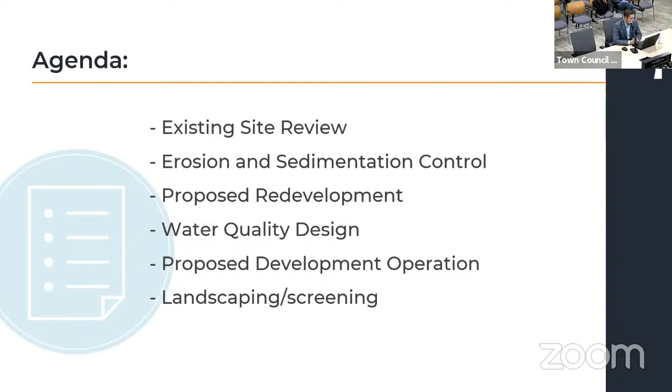Tonight on my agenda, I'm going to go through a brief existing review of the site. I'd like to talk a little bit more about the erosion and sediment control that we are proposing for the site prior to substantial development. I'd like to go over the proposed redevelopment itself, and focus in detail on my water quality design for the site, which is a substantial improvement to what is out there now. There is no water quality design out there now; essentially everything runs off the site to the adjacent detention pond. I'm going to speak briefly about the development operation for Sunbelt and how they're going to work with the water quality design to improve the overall environmental discharge from the site, and also speak briefly about landscaping and screening.

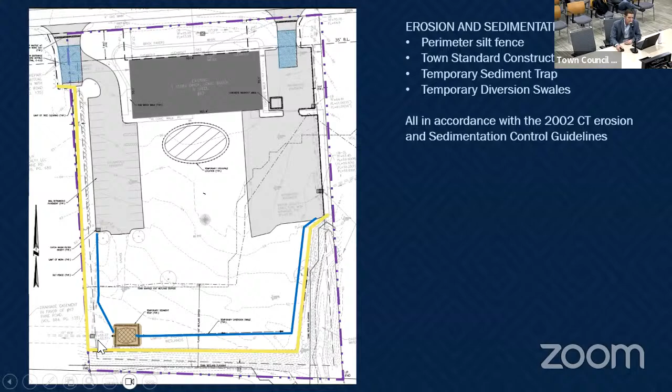As far as the proposed redevelopment for the site, as I previously mentioned, we are maintaining all of the existing pavement identified in light gray on the western side. On the eastern side, we are adding a small amount of additional pavement to allow access by a trailer truck, which needs to swing around into the rear of the property and then exit. To ensure that turning maneuver was possible, we had to add additional pavement in this area. The darker portion directly behind the building is an additional 0.38 acres of bituminous pavement that is installed.

There is also 0.69 acres of pervious stone storage yard. This is not intended to be millings - right now it's being identified as PennDOT number 67 stone, a type of stone with larger and smaller stones that lock together and bind. Unlike a gravel driveway that would rut, this type of stone packs together easier and is easier to track on, but it will still maintain drainage, unlike millings which would melt over time and essentially become another type of pavement. This maintains drainage abilities while still maintaining adequate compaction to allow equipment and vehicles to drive over and park on it.

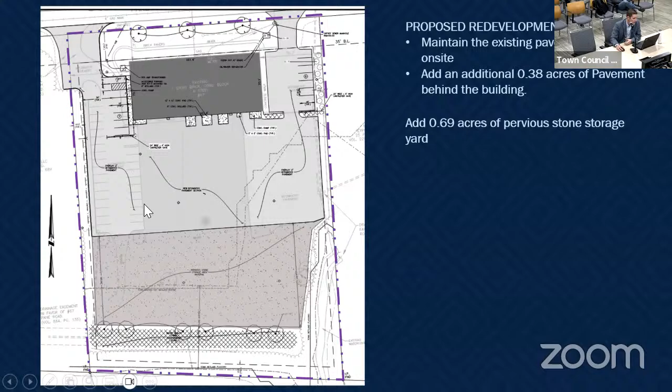So the remainder of the site is outside of the upland review area. There is a portion of the upland review area here where proposed bituminous pavement is located, but it is in the former location of existing pavement, so essentially the surface condition is not changing from pre to post.

Now, as far as the water quality design, to prove that this design is better than it previously was - the majority of the site is laid out grading-wise exactly the same as it was. The high point of the site is where the building is located, running in this direction at elevation 66, 65, and down as you go towards the detention pond to the south. The existing condition basically ran this to the edge and then dropped off down to the pond, with no way to convey, direct, or treat any of this flow.

In addition to ensuring that all of the proposed portions of the site get to the water quality swale prior to discharge, the development operation for Sunbelt is going to place their equipment in a certain way. Their management plan will be such that various types of equipment are placed particularly to benefit the environment.

These are some of the types of equipment that will be placed there - we have pumps, we have some generators. I was told that the majority of the equipment on site will not have hydraulic oil. Anything that does have hydraulics will be placed on the pavement area outside of the upland review area.

The other thing I'd like to reiterate is that these containment berms, in addition to the rented generators and specialty pumps, are another feature that Sunbelt rents. They can be utilized and are designed for secondary containment in the event of a spill. For example, any of the pumps or generators that could be placed within the upland review area could be contained with the secondary containment.

They do have smaller tray options, so essentially it could be slid directly under the machine. In the event of a drip, you slide the containment tray under the machine as a secondary means of protecting against discharge.

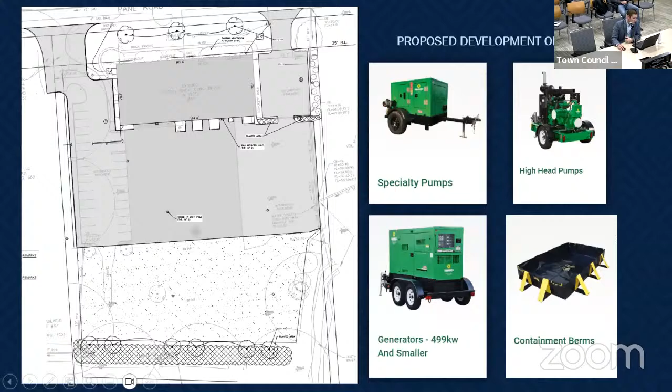I would also like to note, after some coordination with Chris and with Paul, that the developer has agreed to, in addition to the water quality swale, install catch basin snorkels, which are essentially catch basin hoods that are the final stage of protection in the event of any discharge. So if there's a discharge that isn't contained by the machines themselves, isn't contained by secondary containment, isn't contained by the water quality swale, if it were to overtop into the catch basin at the discharge point or any existing catch basins on site, it would stop any of that oil from entering the piping before discharging to the adjacent detention pond and wetland areas.

As far as the landscaping and screening for the site, we are showing landscaping throughout the water quality swale. There are additional screening trees planted along the boundary adjacent to the detention pond. The only vista in this area would be if you were parking behind Stew Leonard's, where you can look across the pond to see the equipment areas. So we placed maple trees to basically screen that.

We've spaced them such that in the event of any snow clearing, the snow can be placed in the swale to contain all of it and prevent it from discharging to any of the wetland areas. There are some additional street trees proposed at the front, and some additional arborvitae and other screening plantings potentially shown in this location that had been removed, although we've been alerted that there's been some additional clearing in the adjacent areas. So the developer has already agreed that if any additional trees for screening requirements need to be added, we can definitely do that along either the western or the eastern edge of the site.

And then briefly, Jen, if you're there, do you want to mention anything in particular about your wetland review and just the functions and values of the existing wetland, just to reiterate the point of the value of the wetland, if that's possible? Sure, I could do that.

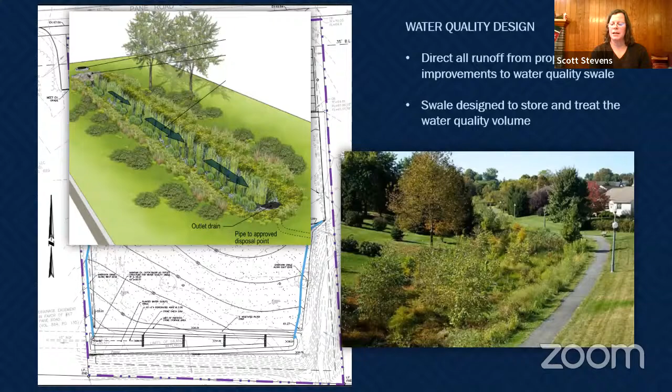Good evening, everybody. I'm Jen Benno with Soil Science and Environmental Services. I've been with the company since 1994. I just want to clarify something: Scott Stevens is a registered professional soil scientist with our company. He did the wetland delineation in November of 2022.

So if you look at our report, on page 3 there are a couple photos of the upland areas behind the building. That would give you a good idea of what the site looks like, at least when I was there on November 3rd of this year.

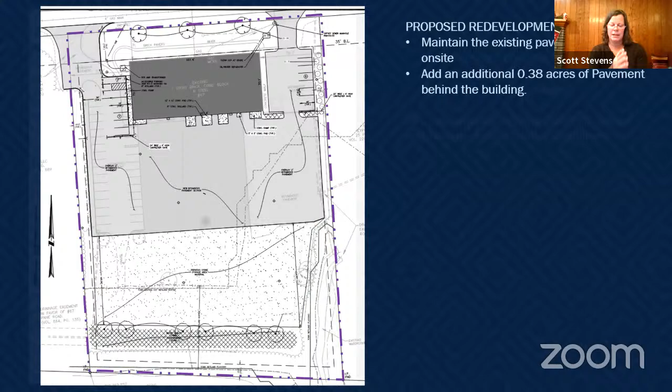And the pictures basically show that the entire area behind the building was cleared. You can see the vegetation, there's really dense vegetation on that side slope, from the top of the bank down to the detention basin area. You can see it on the aerial.

Scott did the wetland delineation, as I mentioned, November of 2022. His delineation report is under separate cover, also for that date, November 3rd, 2022. He delineated a perennial water course in the southeastern portion of the property, which enters the site from the west.

Yeah, we can go to that existing conditions plan sheet. Pretty much half of the upper section of that water course on site is lined with concrete. The rest of it, you can see where they had some previous stabilization measures attempted, including riprap and silt fence, but you can see obvious erosion along the water course. You can also see that in the pictures on pages 6 and 7, which give you an idea of what the perennial water course looks like.

So along the detention basin, which is south of the site, there is a very narrow wetland fringe, which was delineated by Scott. It has developed into what they call a palustrine emergent, like a shallow marsh, dominated by a lot of Phragmites. There's also a palustrine shrub, or shrub swamp, component to that. That's pretty much about it.

We did see several cans, bottles, and things like that floating around in the water. Unfortunately, we saw some miscellaneous debris, most likely from the old Frink's utilization of the project, and that would be in the southeastern portion of the site, and probably a little bit off-site too.

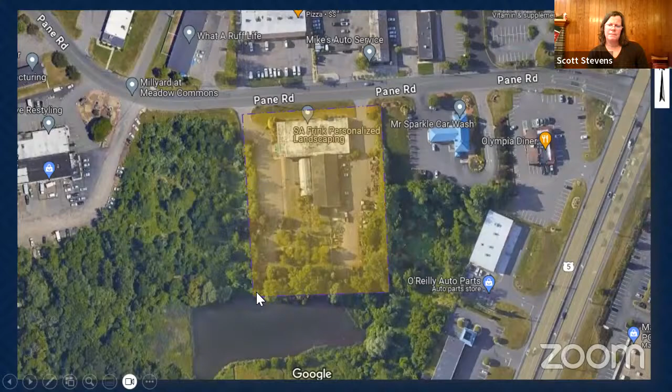So I think that's pretty much summarizes our report. If you have any questions, I'll answer. Excellent. Thank you very much, Jen.

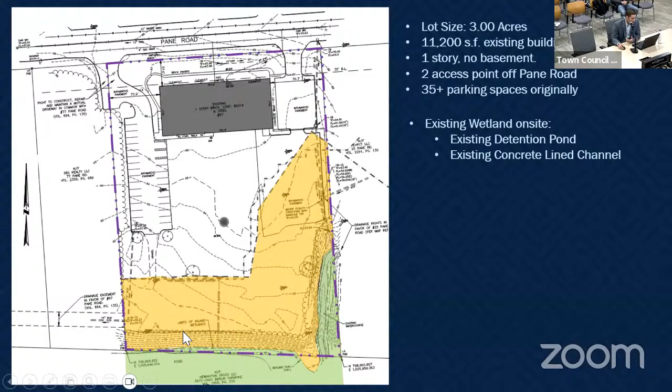I just wanted to reiterate the fact that because it is an isolated wetland and the functions are limited in this case, that essentially summarizes the presentation for this evening. We would like to respectfully request the administrative approval of this moving forward. Hopefully we have satisfied all of the requirements associated with the regulation at this time.

With regard to the multiple levels of containment for any potential spills, there will be spill kits on site. There will be containment of the individual equipment, secondary containment, water quality swales, and treatment measures at each individual catch basin. In addition to the fact that we have a limited functioning wetland, we would like to again request the administrative approval. Thank you very much.

Turn it over to my commissioners to see if there are any questions. Commissioner Paskowitz, go ahead. I don't really have a question, just a comment. This is one of the most thorough, comprehensive presentations that I've witnessed in the 11 years I've been here. Thank you very much.

Any other commissioners? Chairman Zelik? Commissioner Sadil? Yes, I do have a few questions for the applicant. Can you go back to the map that you showed of the site?

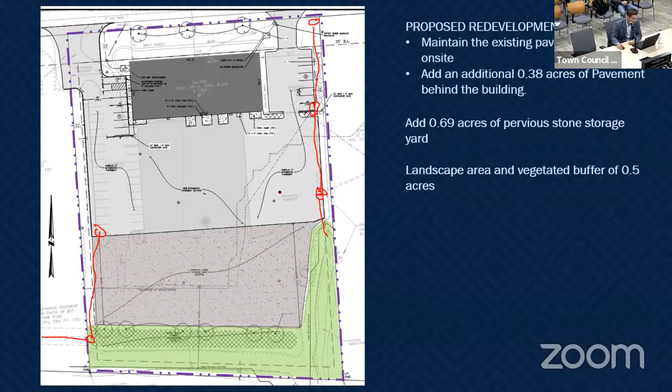No, I do not anticipate that, if I can jump back to the drainage plan here, or the grading plan.

All of the grades associated—let me switch to the laser pointer—the high point of the site is located in the vicinity of the main building, so everything runs away from that. I'm not anticipating that any of the design associated with 77 would encroach into this area or onto our site. If anything did, following installation of any sediment controls, they would direct that flow over to the existing discharge point and into the drainage system. As far as the controls for our site, I do not anticipate any of their construction affecting this.

Looks like he's dropped off again. Commissioner Sadil, so—all right, while we wait for Commissioner Sadil to rejoin, any other commissioners, questions?

Just a preliminary question—is Sunbelt still in operation on the Berlin Turnpike, or was that here? Yes. Okay, because I haven't seen any. So they're going to move from that location to this one? It was yes, they are—a representative from State Point, Mr. Sean DeBella, commented on that. Yes, they are still in operation.

I'll switch over to that area. It is not required by law. It is basically a good faith effort to provide additional containment measures.

I'd like to add that Sunbelt's intent is for all this equipment to be rented. This is a storage yard, but ideally they would love the yard to be empty because everything is currently being rented. They will have on-site maintenance designed in accordance with the state regarding cleanup for oils and so on.

The intent behind the maintenance associated with the development is that the equipment there will be in good running order. It is not going to be leaking. It is going to probably leave the site as soon as possible. It's basically intended to be transitory, but as an additional measure, the option to have secondary containment in place can be deployed.

Most of the machinery has built-in containment within a lot of the equipment. A lot of the equipment uses fuel cells instead of regular gas tanks as another means of maintaining adequate secondary containment. We have additional secondary containment on site that can be deployed as necessary.

Especially if it's within the upland review area or directly adjacent to the bank, even though we have swales intended to direct everything to the water quality swale, why have it discharge if we can essentially contain it? What I'm hearing is the trays are optional and can be deployed if needed.

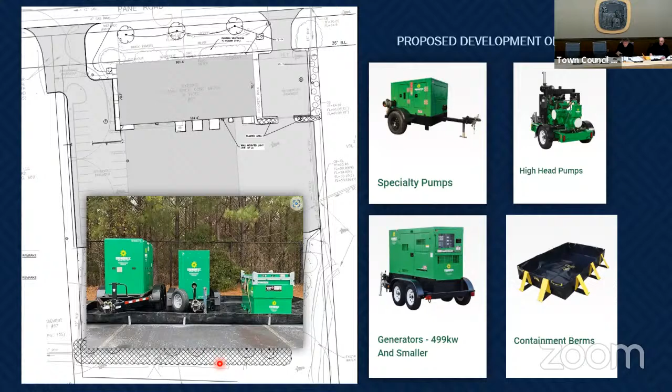They're not going to be in use all the time. That is correct. Any comments from staff regarding that? No, it's a good faith effort on their end. I can't think of another application that's come before you that's even offered that in the past.

And then for staff, the detention basin - would we agree that was the original primary function of that water course area? This is not a named water course, correct? Correct, this is not a named water course. Looking at surrounding plans and the development process in the past, it appears it was intended as a detention basin to capture a lot of this water from development.

Some of it even comes off the turnpike down Pane Road. A lot of it also comes from the car wash. That's why they have the easement that runs through their property - they're allowed an easement to discharge through the property to the west. So they've taken all that into consideration.

Any other questions or comments from commissioners? Any other comments from staff? Mr. Chairman, can you hear me, Mr. Chairman? Commissioner Sadil? Yes, please, if I may have the floor. Yes.

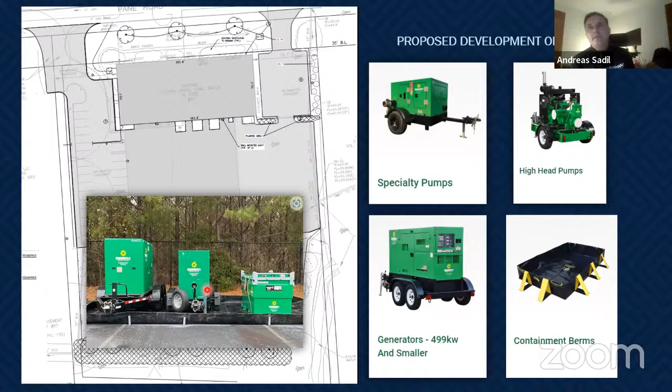Question - you had some trees in the foreground there, right where that photo was. There were some trees right in back of the building there. I assume those had been removed. They're not exactly in the upland review area, but there was a grove of trees right in front. That area is one of your earlier slides - you showed where that was.

Let me go back to the aerial view and I can identify. Were you referring to this area right here? Yeah, that square. I assume that's no longer there. That is no longer there.

To clarify a previous statement I made for the record, this is a component of what Fink's was using for some of their displays. A number of these trees were actually in pots and root balls, so if the public wanted to purchase a tree, it could be removed from this area. There were some permanently planted trees, but a large number identified on this plan were essentially stored and could leave the site.

Have you seen any erosion? Obviously it's past, but have you seen any erosion in that area? I assume you're going to have these new block type arrangements where the water can go through the blocks down into the ground - is that my understanding? I'm sorry, could you clarify your question? So now that that is out of the way, what erosion have you seen in that area?

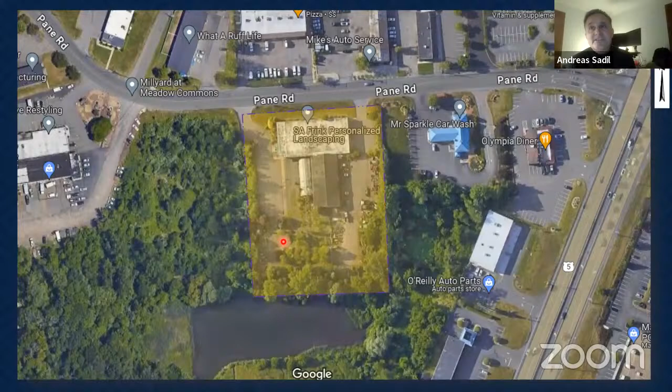Any erosion would essentially follow the existing condition down in this direction, and ultimately under the design, it will all be collected with the water quality swale.

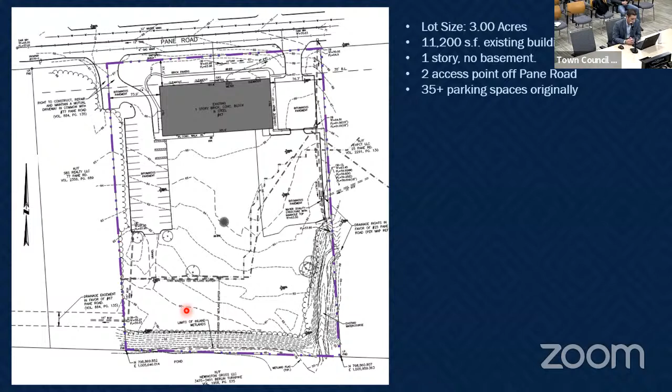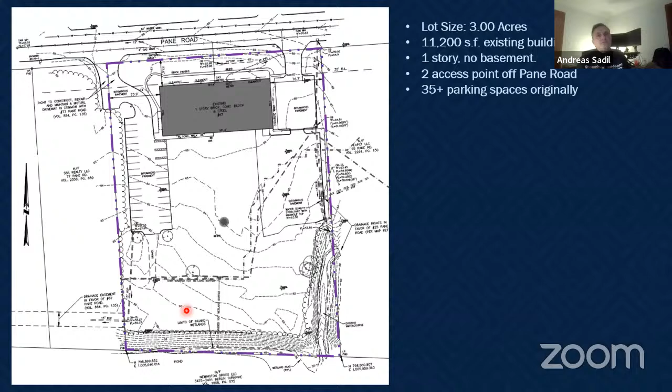Relative to the swale itself, how stable is the embankment there? That is an extremely steep embankment on the bottom there. Any danger when we start digging with a backhoe? If you show the plan where you had the swale—you're right up against the embankment there. You see, right where you have your cascading dam. How stable is that embankment that you can go in there and dig out the swale, or maybe I've got the wrong idea?

No, we designed this intentionally so that we did not dig anything down directly adjacent to the slope in this area. I know it's kind of hard to tell, you can see where the grades come across, but essentially we are not lifting any of the swale adjacent to this slope, and any excavation we're doing is set back. This is, I believe, between a 3 to 1 or 4 to 1 slope.

So the ultimate depression portion of the swale is located a good 12 to 15 feet back from that existing slope. The elevation difference between the bottom of the swale and the top part here is only about 2.5 to 3 feet. So the maximum height adjacent to this is only about 3.5 feet, and only about 2 feet at the top portion of the swale. So the majority of the slope is occurring beneath the entire swale design itself.

Therefore, we are not anticipating a volume of water here that could ultimately overtop and discharge down this slope and erode it away. The slope is currently stabilized with existing vegetation—it may not be ideal vegetation, and I'm presuming there are some invasives in this area, which Ms. Benno could probably speak to. But it would not be our recommendation to disturb this area, because disturbing the existing slope would substantially destabilize it and would be expensive to maintain erosion control and slope stability afterward. That's why we made sure to keep as much of our design beyond the limits of the top of that slope.

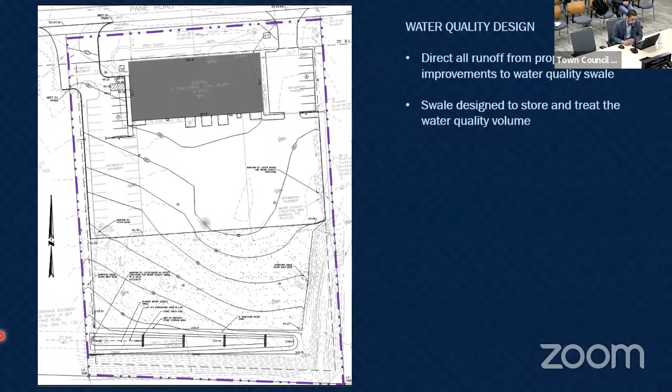Thank you. I do have a question for Ms. Benno. It appears from the plan that those six trees are going to be sitting in the swale—is that correct? They're going to be tough to take root in that swale area, right?

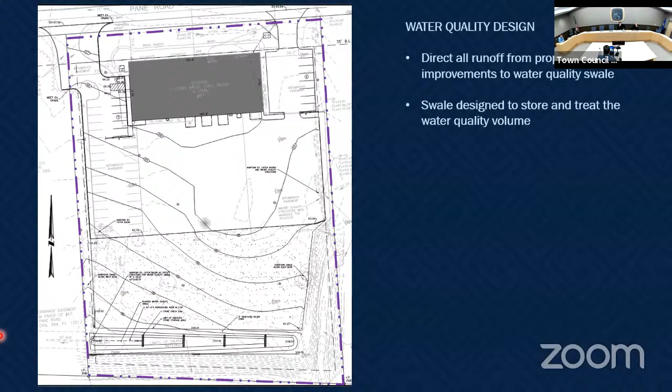I cannot answer that question. I didn't devise that plan and I haven't really reviewed the plan.

I can answer that. Those trees, as shown right here, are on the very edge of the slope. There's going to be a small vegetated filter strip about 2 feet wide. The orientation might be hard to read based on the location of my green icon, but those would be located directly on the top of that bank.

They would be installed, and during the installation process there will be some stabilization required during the planting stage of the water quality swale. There would be jute matting or other erosion control measures installed, intended to be left there and ultimately degrade over time, further supporting the additional vegetation and seed bed areas. Those would be installed adjacent to those trees to basically armor the slope.

But the trees themselves, once they begin to take root, are one of the most optimal ways of holding that slope together, with all of the root ball and all of the roots that come out of the trees.

I know, Ms. Benno, one of your favorite conditions is the 3-year plan that there must be take root for 3 years. In case not every tree is the same, do you envision having that same condition on the permit?

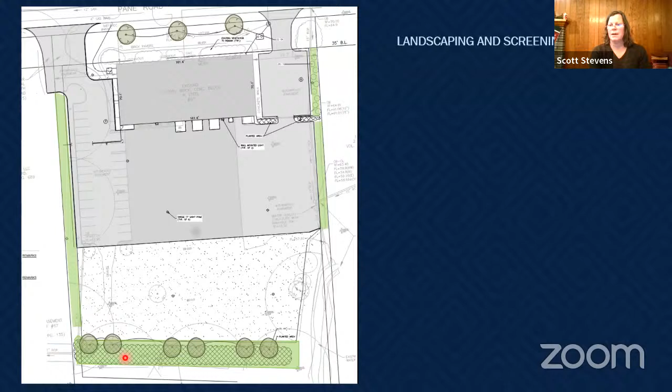That's something we typically do recommend on our projects in the town and other towns. That's basically a good opportunity to make sure the area is functioning properly. So that would be up to you.

Well, actually, it's up to the applicant. Are they open to something like that? It's a pretty good condition that you have to take root within 3 years. Otherwise, the planting has to be replaced.

If I could clarify your question, Commissioner, there's a stipulation that there is a 3-year time frame to ensure the vegetation has taken root. Do I understand your question correctly? Yes, sir. I can also send you draft language of what we've used before, just so you can review it. Typically it's an inspection, and as long as a certain percentage are still viable, you're fine. Otherwise, you replace in kind. Understood.

Has the trees and the vegetation been picked out yet? Have you made a selection, especially for the trees? We have a selection of the type of plantings we'd be specifying within the swale. I apologize, I don't have the information directly available in the presentation. Let me see if I can pull up the planting plan.

What I'm getting at, sir, is I like trees that are not prone to storm damage. People put plantings in, and you have a storm like we had this past day, and they get wiped out, with snow. That's my motivation for my question—it has to take root, and it's better for storm tolerance, because some trees we plant down the street here get taken apart with each storm, there's almost nothing left anymore. If you pick something tolerant to storm, the branches don't come down when it gets up in size. Even after 3 years, when the tree gets big, it tends to be prone to storm damage and can lose a significant amount of limbs.

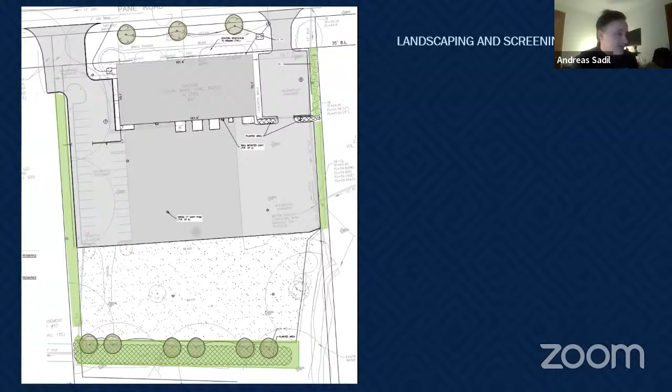I can tell you that the trees on the lower half, the southern half of the site, are red maple trees. And then the street trees are coffee trees, which are smaller, more street-familiar types of trees. There are arborvitae proposed, and the majority of the other plantings are all low shrub type plantings, which are more intended to be utilized for water quality treatment as opposed to larger vegetation. Understood, okay, thank you very much.

Thank you. Any other questions from commissioners?

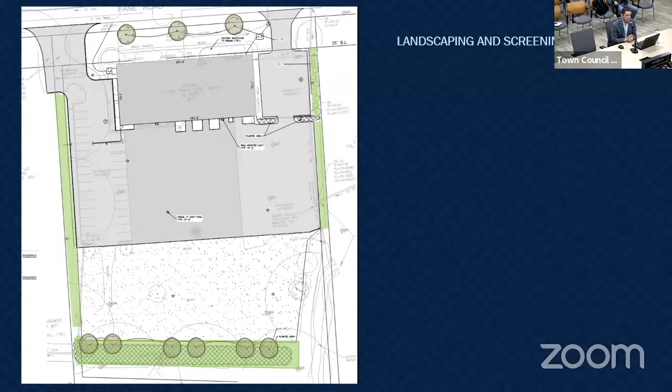I'd like to thank the commissioners for their very thoughtful and thorough questions. And I'd like to get a sense—Mr. Chairman, I do have some site photos that I took today with the town engineer. I don't know if you'd like me to share them. It might give you a concept of the space as well.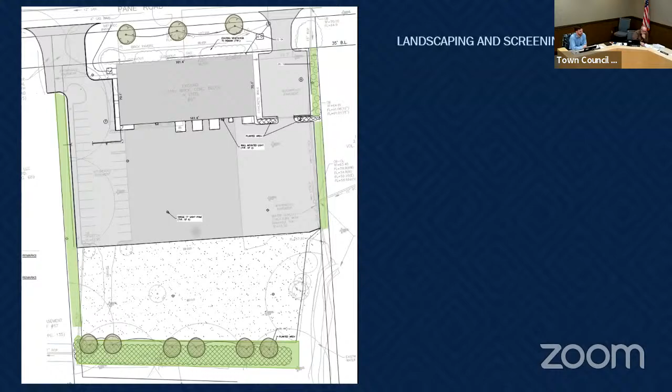Sure. So let me share.

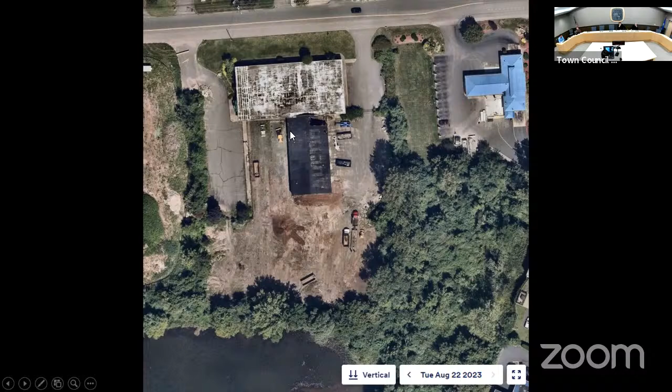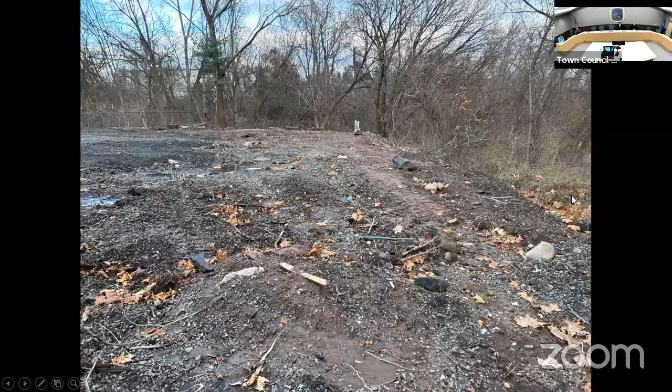Again, looking at the back of the site, the slope is to your right. You can see some existing pots and things left over there from the past nursery use.

Again, there is an existing wood curb at the back of the site that was there for the show area where they had the plantings, and it really delineates where they had stopped previously as part of the development of the property. You can notice the area was cleaned out some, and there was work done.

This is the area in the back where that catch basin is. It currently, as Mr. Vaca noted, is buried. We actually found a couple of pallets of stone left over from the Frink's use in that area, and the basin may very well be under one of those pallets. That is something we're going to be asking the applicant to take a look at, regardless of the application—to evaluate, clean out, and look at the existing drainage system, and also look at adding erosion controls into the areas to be restabilized.

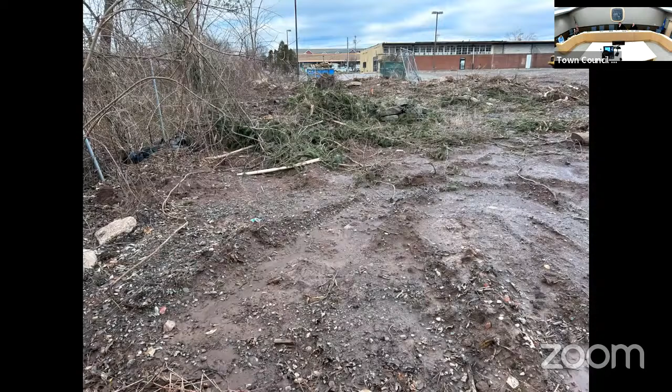This is looking from that area north. There's also a catch basin that would be in this area of the property that we couldn't identify out there with me and the town engineer. Again, an area to be cleaned out and reviewed. It would be done as part of this application, but we're going to work with the applicant and the property owner.

So there was some work done noted between the two aerials. When you look at the two different aerials, pretty much within most of the disturbed area, there was a lot of cleaning up and bins removed, and a little bit of work done on site. So I wanted to give you a layout of the property, and we will be working with the property owner regarding cleanup on site, the catch basins, and any erosion controls.

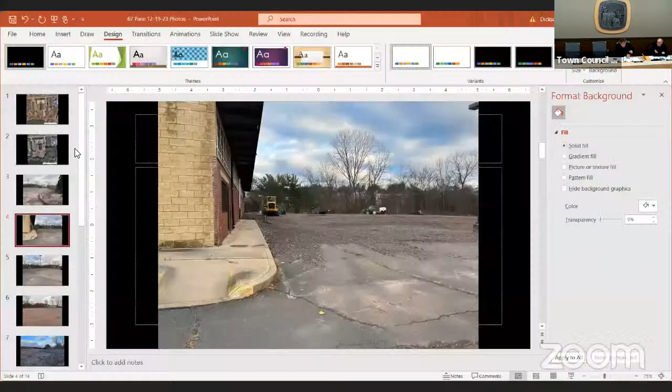So at this time, I'd like to ask the commissioners their feelings on whether or not a public hearing is necessary for this application, and get a consensus from the commissioners, please. Commissioner Paskewicz?

I see the abutters are listed in your packet here. So they've all been contacted regarding this. Yes, they have. They are aware of the photos and they are aware that we've been out there. Then I'm satisfied. Thank you.

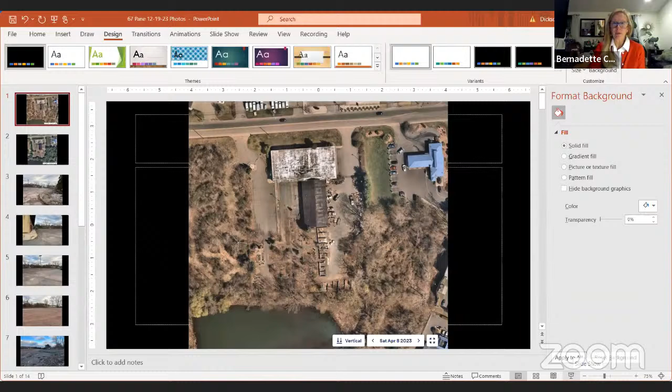All right, Commissioner Conway. Yes, I guess my question would be: if there are no residential neighbors, I would be more inclined to forego the public hearing. Is that more common in a residential area where the neighbors are not businesses? It's regardless of whether it's commercial or residential, it's more about the public interest. Also, based on the impact, in this situation it appears as though it's just a redevelopment of an existing disturbed area. My opinion is a public hearing is not warranted, but I do want to hear from the other commissioners.

Chairman Zellick, Commissioner Sadell? Yeah, I'm with you. I think, given the nature of the area, very private commercial, I would be inclined to waive the public hearing. Very good. Commissioner Wimett? I waive the public hearing.

Okay, in that case, can I get a motion that a public hearing is not necessary? So moved. Could you actually read the motion? Yeah, if you could read the motion. There's a section here already drafted for the public hearing. The motion is for no public hearing: this activity will have no significant impact in the regulated area and will not require a public hearing.

Mr. Chairman, he should read the application information above, so we're clear on which one we're talking about, please. Okay, it's for application 2023-16, for drainage improvements, grading and pavement within the upland review area at 67 Pane Road. Applicant is BSC Group Incorporated. The owner is State Point Properties. The contact is Frank Baca.

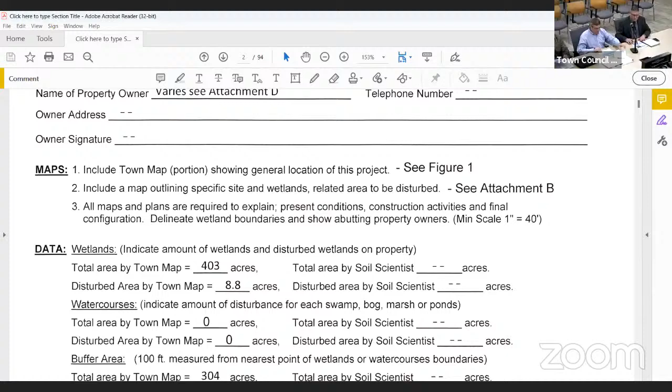So Jason introduced all of us. This is part of the MDC's vegetation management program for all of our sewers. The big picture here is the district, as everyone is aware, has a large number of sewers in our area, including the town of Newington. I guess we can go on, that's a good summary slide right there.

Within the town of Newington, the district has a total of approximately 130 miles of sanitary sewers. Most of that is within the roads, within the right of ways and the roadways and so forth. But something like 34 miles of it is in easements, which can be on town property or private property or stuff like that.

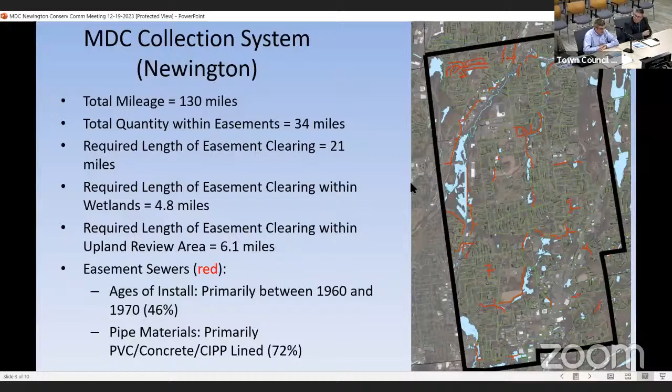The state has actually required us to inspect all of our sewers. So the stuff that's in the roads is easy to do, the stuff that's in the easements in parking lots and so forth is easy to do. But the easements that are back in the woods are not easy to do. In fact, since they were installed back in the 60s and 70s, they've been growing vegetation for the last 50 or 60 years, and it's kind of hard to get to, which means we can't inspect them. We can't look at them, we have no idea what their condition is.

So part of our consent decree, we're actually required to do inspection and everything else. So we identified 21 miles of sewers in the town of Newington that will require to be cleared so that we can get to them. Of that 21 miles, we've identified that almost 4.8 miles is within wetlands and 6.1 miles are in the upland review area. Like I said, these pipes were installed back in the 60s and 70s for the most part, a large portion of them, PVC concrete, some of them have already been lined.

Onto the next slide there, the driver for it is our consent decree, which came from Connecticut DEEP and EPA, requiring us to, among other things, set up a CMOM program and ultimately to find out what's going on with our sewers and eliminate the infiltration, which is water seeping into the sewers, extra water to treat, which leads to overflows, and inflow, which comes in from either manhole covers that are cracked, missing, not in place, or need to be reset and stuff like that.

So the typical kinds of things we do as part of a CMOM program is inspect the sewers. To inspect the sewers, we need to be able to get to them. And that's the problem with a lot of these sewers that are in easement areas that need to be cleared, which obviously includes wetlands and the upland review area also.

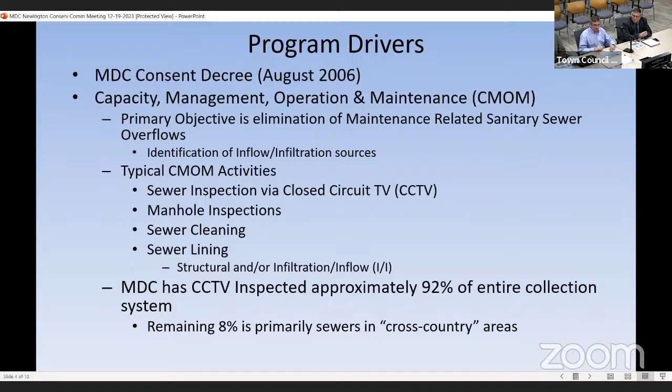To date, we've inspected approximately 92% of all of our sewers throughout our entire system. What's left is these cross-country ones, which is what's driving us to come to the town of Newington. We've actually been doing this throughout the district - we've done work in Bloomfield, East Hartford, Rocky Hill, and most lately Windsor, and now I've moved to Newington to get our easements cleared out so we can do this inspection work.

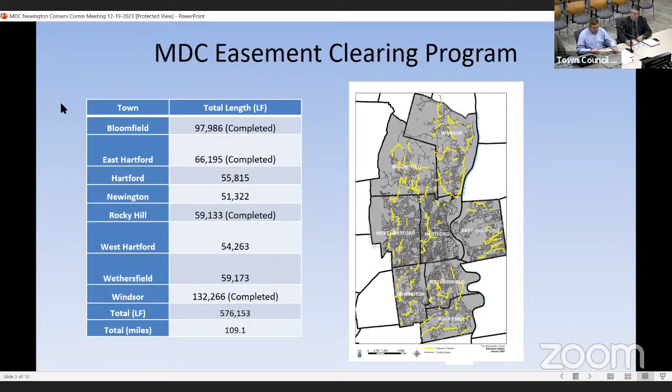The next slide shows what this looks like. One thing to emphasize is this is not big machinery coming through. We've got a contractor, Lavoie Horticulture, who may be on the Zoom call, and they do this work primarily with hand tools.

They've got a very good program where they come in - a few slides later it talks about the actual procedure, but basically you can see the work that they do there. You end up with ideally a crew going through with hand tools, resulting in a natural looking area - not a lawn, since a lot of these are back in the woods - but a natural area that you could walk through, or that we could get our inspection equipment through. In fact, this kind of work even creates wildlife corridors.

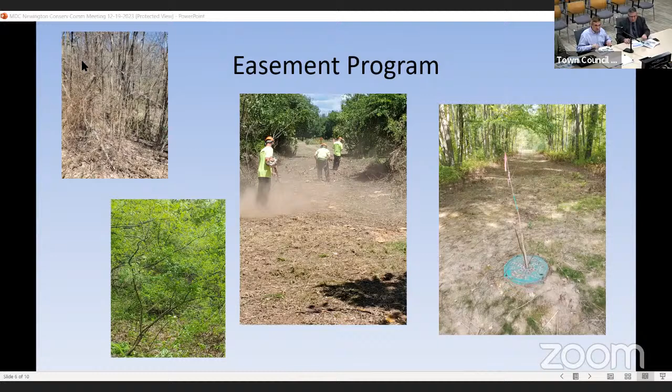The CCTV equipment we use - we purchased a vehicle that allows us to go through the easements instead of some of the larger equipment that's often used, which requires the full 20-foot wide easement. This cross-country vehicle only requires us to clear about 12 to 15 feet wide. So we're not even clearing as far as our easement is, and this allows us to get cameras in there in these cross-country areas.

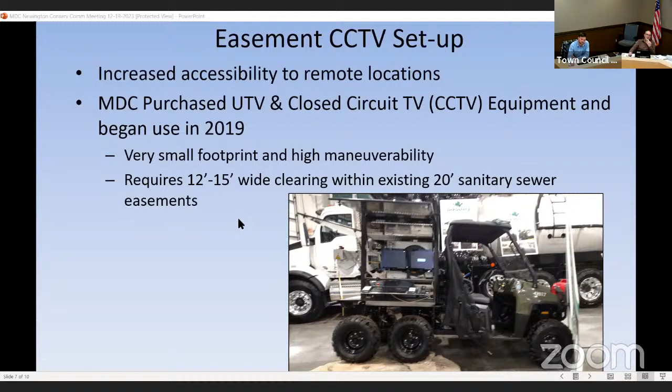You wanted to clarify, I see it's on the slide, but how typically wide are your easements? The easements are typically 20 feet wide. Yes, the commission understands it.

Chairman Zellick, if I may ask the applicant a question.

Commissioner, I'd prefer that we hold our questions until the applicant is done with his presentation, and then we can come back to questions.

You continue, please. Okay, the next slide shows an example map area. As part of our application, we have maps of all of the easement clearing areas, and they show all of the wetlands and the upland review area for all the areas in which we're doing this clearing.

One thing to emphasize here is this looks like we are going through this wetland area and everything else, but we're only talking 12 to 15 feet wide within this - so it's a pretty minimal impact. And again, we're doing this where there is already an existing sewer.

Some of the things we talked about in our application is the fact that we're not doing any grading. We are basically just clearing, and within the wetlands and the upland review area, we're not even removing the stumps. Also, you're not constructing any roads, correct? Correct, there's no roads being constructed either - it's not a logging operation.

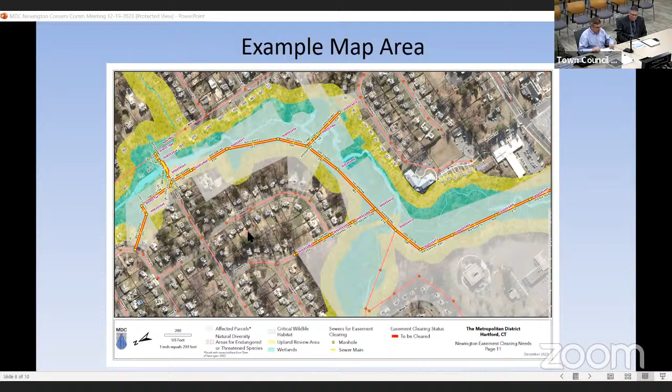The next slide here shows our typical sequence. We've been very big on sending out notifications to property owners and the abutters. And the next slide shows an example of letters that we have been sending out.

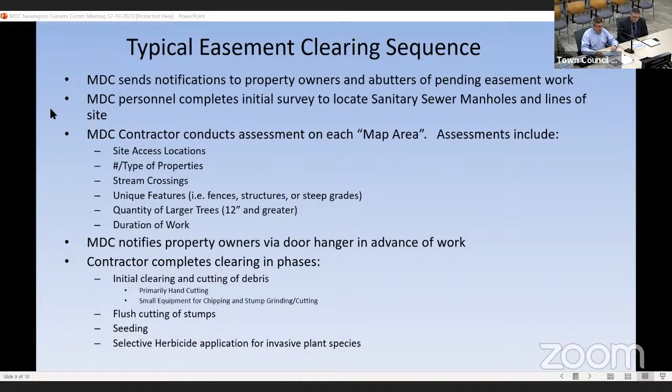We've been doing this throughout the entire project. We typically send the letters out weeks or a month or so before we get into a given area. And then right before we get to an area, we have door hangers we put out to give the resident owners and everything else a heads up that something is happening.

In addition to the notifications we did via letters and everything, we've also been trying to get the word out as much as possible to the town. We already did a presentation to the town council. And I believe they might have put a notification out on the website as well, kind of one of the news flashes. I believe it was in September.

So we did do a presentation to the town council already. We have letters going out, we have door hangers before we even go out into a given area. So the first thing we do is we get a surveyor out there to go ahead and basically find the manholes with GPS, which can be an issue sometimes in some of these wooded areas.

Our contractor scopes out the area, looks at the maps I talked about, and comes up with a plan on how they're going to go ahead and do the work within a given map. Most of that is how they're going to access it, because you can't always just go down the easement, especially if it's going through a wet area. So sometimes he has to make arrangements to get access other ways.